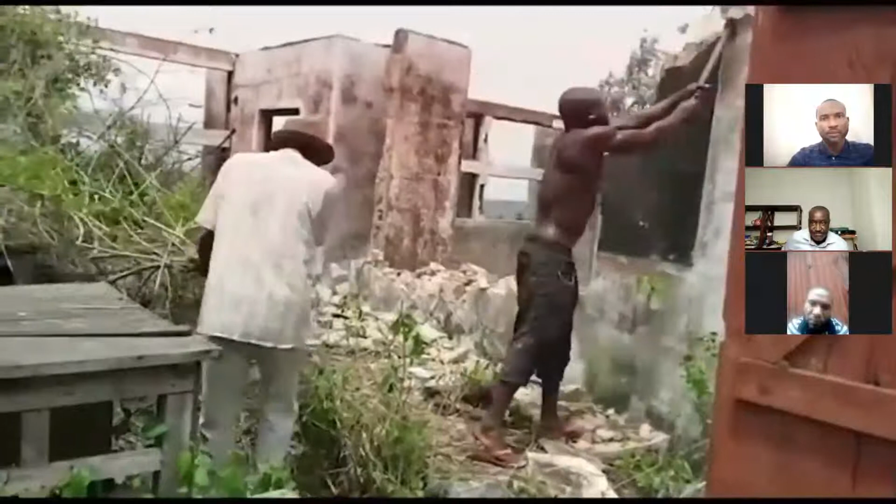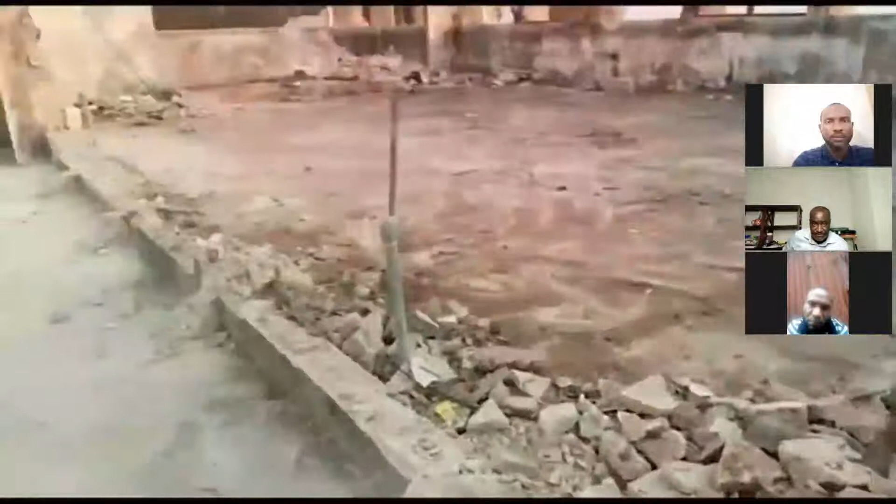Good day, everyone. I wish to welcome you to this ongoing project of laboratory renovation work by the IDA at the Ibere Secondary School. This is the first day at work. We began by demolishing part of the structure that needs to be adjusted. Here are some of the materials that have been supplied, and the walls are coming down gradually. The clearing work began today, and this is how far we've gone. We are gradually dismantling the areas that need to be demolished. These walls also came down today. This is the last section of the hall.

Clearing will continue tomorrow. Okay, so now, before this stage, what is the first stage before you get to this particular stage? Okay, every project begins with planning. Planning is one of the first things that happens where a client is able to say this is what he wants. It is the achievement of that objective that makes a good project. So before you start site construction works, you need to do a design that meets the need of the client.

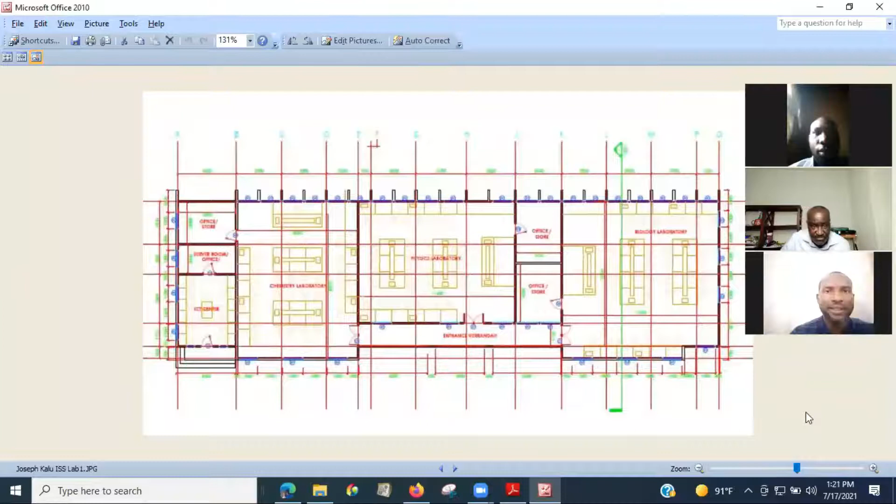Okay, so in this particular case, this was done, right? Yes, sir, it was. All right, just give me one second. So what is this called? That's called a floor plan, sir. Okay, so this is the first thing that is done. Yes, sir. So after this, what's the next thing? Or is there any other type of drawing that is drawn in addition to this?

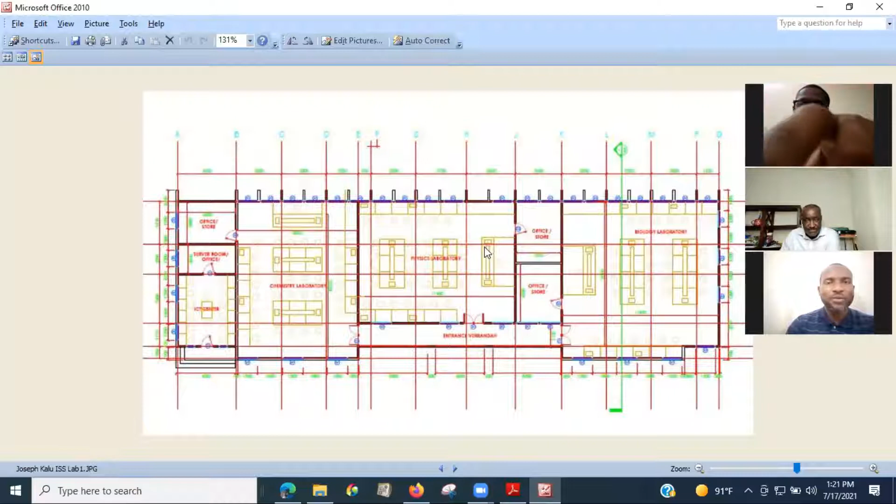Yes, the architect does not work alone. He works in partnership with the structural engineer, the electrical and mechanical engineer. We also engage the services of a surveyor who does environmental impact assessment, site analysis surveys, and all that. Those form the complete package of drawings. So depending on the complexity of the project and where it's located, those things are needed.

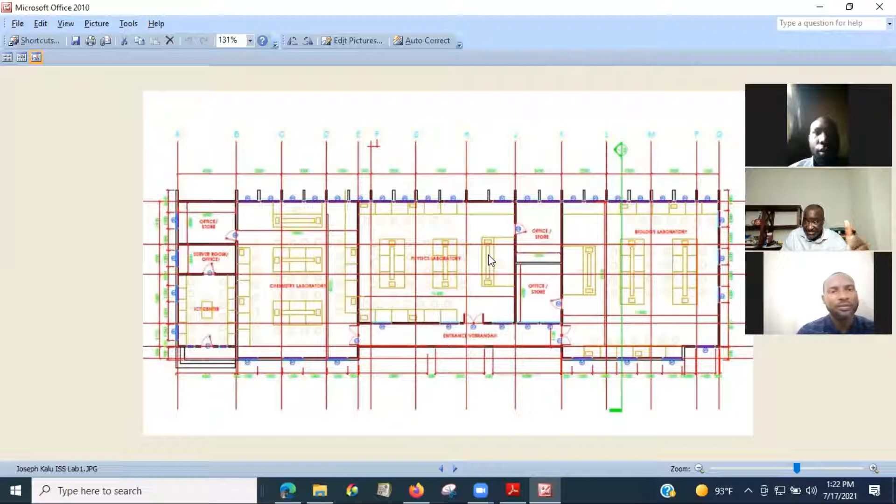So in this particular case, the services of an electrical engineer and a mechanical engineer were used, and they drew part of the necessary drawings. Yes, sir. Okay, so now how about this? Can you explain this to us, please?

This is a structural detail that shows the framing, the structural members, beginning from the columns to the beams and then the roof trusses. So it looks like there are so many pillars or beams, I don't know what they're called. So how many pillars can you tell us you have here?

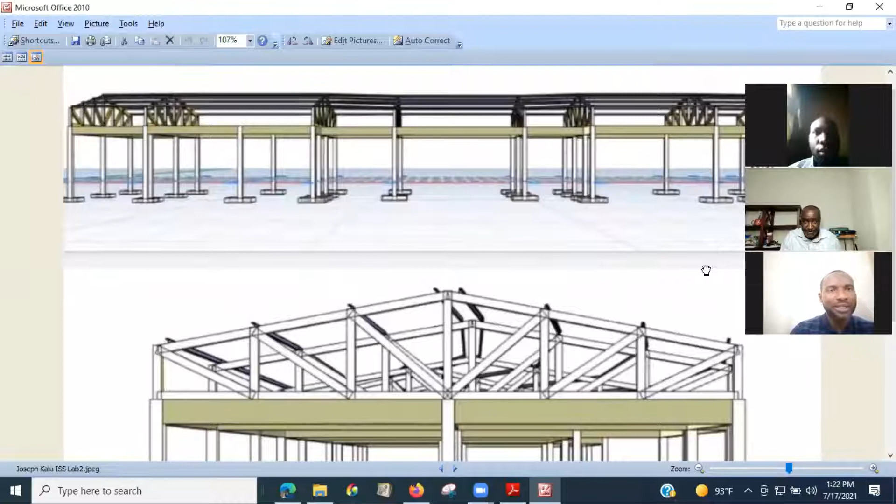Well, the number of pillars in a building depends on the span of the building. So it can vary, but you have to make sure it's within a safe span so that you don't have a collapse in your structure after construction.

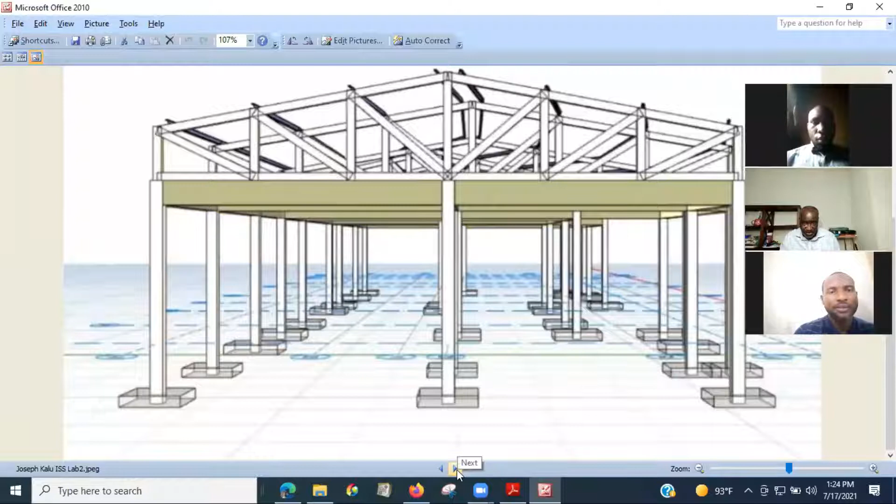Okay, how about this horizontal thing I can see? Those are called the beams. The vertical ones are the columns, and the columns have a base at the lower part which transmits all the forces the column is carrying safely to the ground. The beams link most of the columns together and also transmit the load of the roof evenly to all the columns, which then transmit it to the earth. So that's the purpose of columns and beams in a building. Yes, sir, they are structural members.

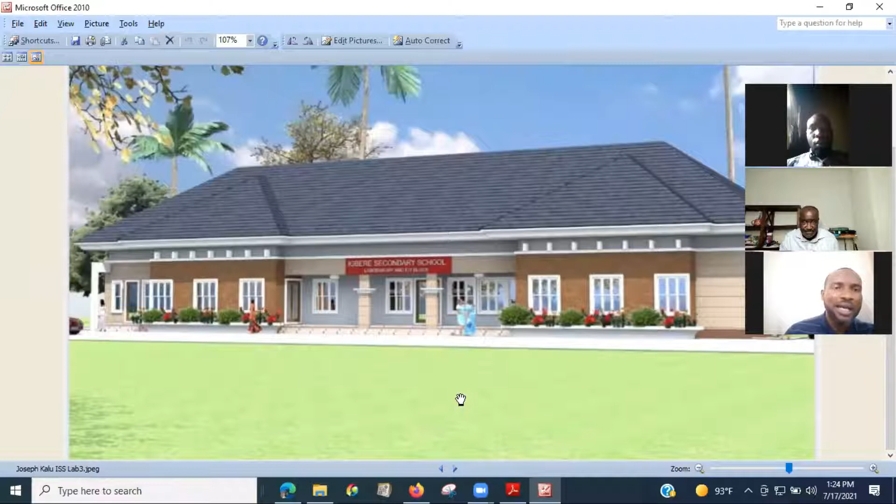So how about this? These are the 3D view of the structure, what it should look like after construction, sir. Like how many laboratories do you have in this structure? We have 3 laboratories, the chemistry, biology, and physics labs, and each of them has an office stroke storage area.

So now let's get back to that video and see. We have seen the demolition, let's see other stuff.

Good evening everyone, this is day 2 of work. Demolition is ongoing. We also started excavation and blinding of the foundation and installing of columns. This set of columns are in place now, and these other partitions with the columns are also in place. We hope to start raising new walls from tomorrow. I'll keep you posted as we proceed. Signing out on this second day of work is Architect Joseph.

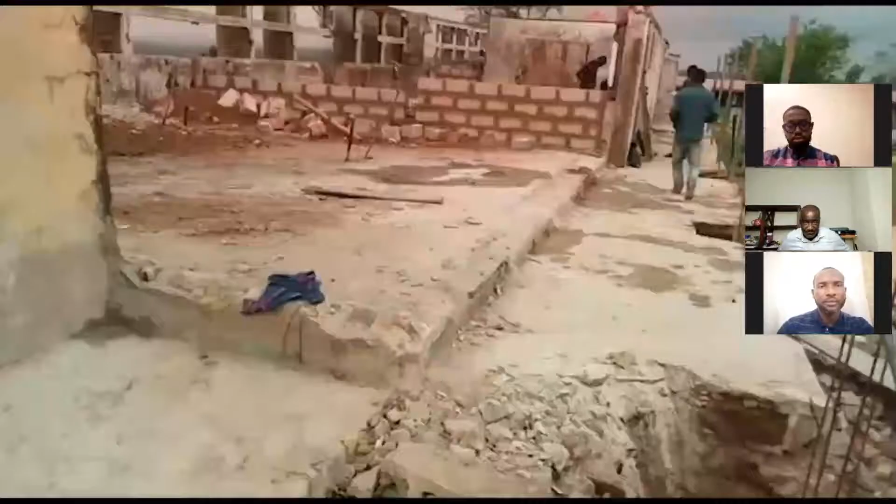Good day everyone, this is the 3rd day of work. The columns are in place, and the partitions for the laboratories are beginning to come out. The walls are rising. This is the first, and that is the second laboratory, and this is the third one coming up, with the office in place. We hope to take this journey further by tomorrow.

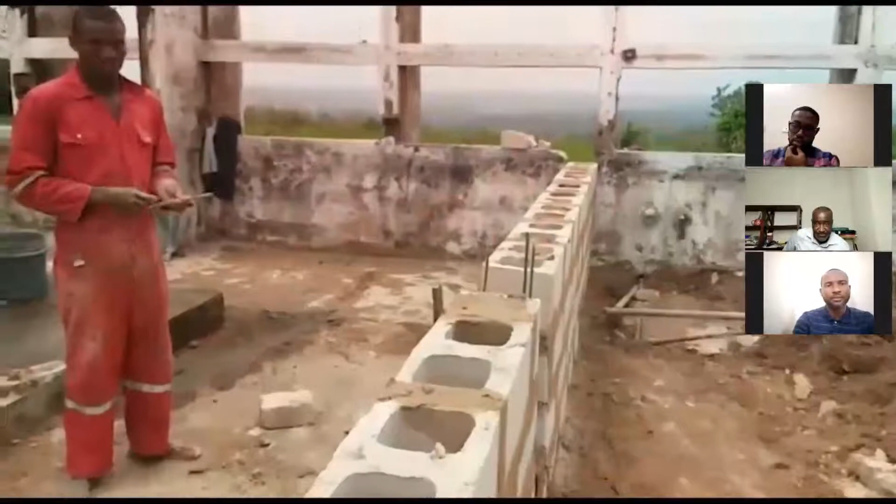Okay, so you mentioned about excavation and blinding. So what is that?

Okay, every building has basically 4 phases. One of them is the substructure, which has to do with the foundation. So for the columns, you start by excavating, then get your reinforcements in place, then cast the foundations, and begin to raise the block works up to the damp-proof course level. At the point where you finish your damp-proof course, you can say you're done with the substructure.

Then going forward, the second phase is what we call the superstructure, which has to do with the work from the damp-proof course all the way to the roof beam level. The third phase of buildings is the roofing stage, and the fourth stage is the finishing level. Then you could now have the landscaping coming up. So those are the various phases in building construction, basically.

So you mentioned the German floor, what is that? That is the damp-proof membrane, a damp-proof course, which forms the solid ground at your ground level, the final ground level finish.

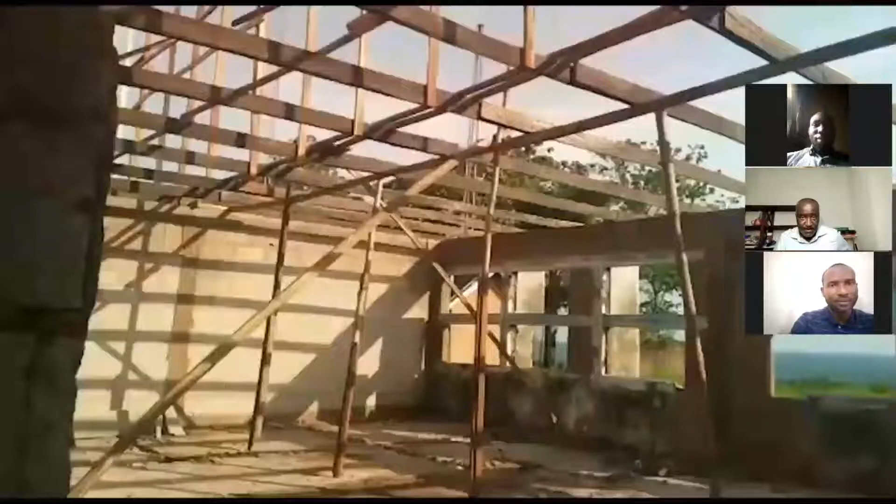This week we made progress on the roofing. We bought and started installation of the roof carcass. So far the king posts and tie beams are all up. Those are the tie beams running across, visible through this classroom, through the corridor, and into this classroom. We have to make good progress on this during the coming week.

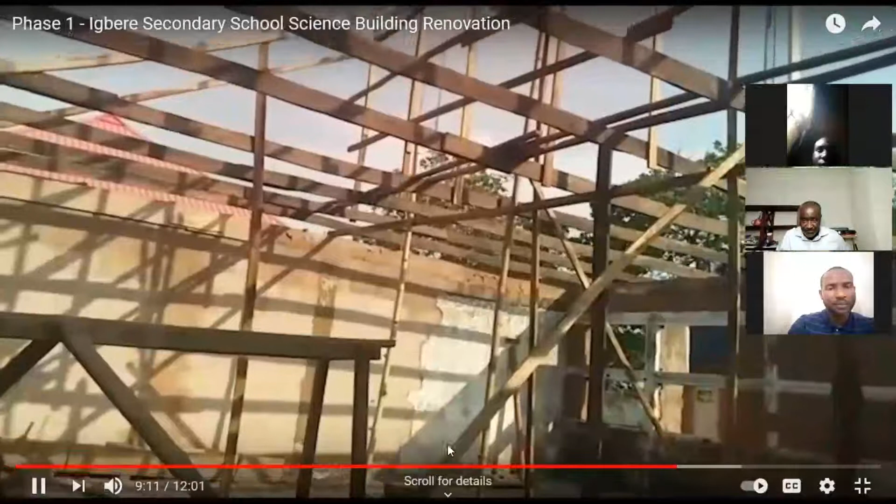So you mentioned roof structure or roof carcass, can you explain technically what that means? At the roofing stage there are three basic steps. One is the roof beams, where you chain the pillars and get a beam that collects the load of the roof and transmits it to the columns. The second is the roof carcass, where you do either a wooden truss or iron trusses. The third phase is what we call the roofing sheets, and the client may choose what material he wants for his roofing sheets.

Let's fast forward a little bit. So there's already roof installed, the roofing sheet going up at that point. I'm sure by tomorrow they'll be rounding up.

Good evening everyone. Today we come to the completion of this first milestone of getting this work to the roof. We are grateful thus far. God has helped in this project, and we want to thank everyone, the IDA people, that have made this possible.

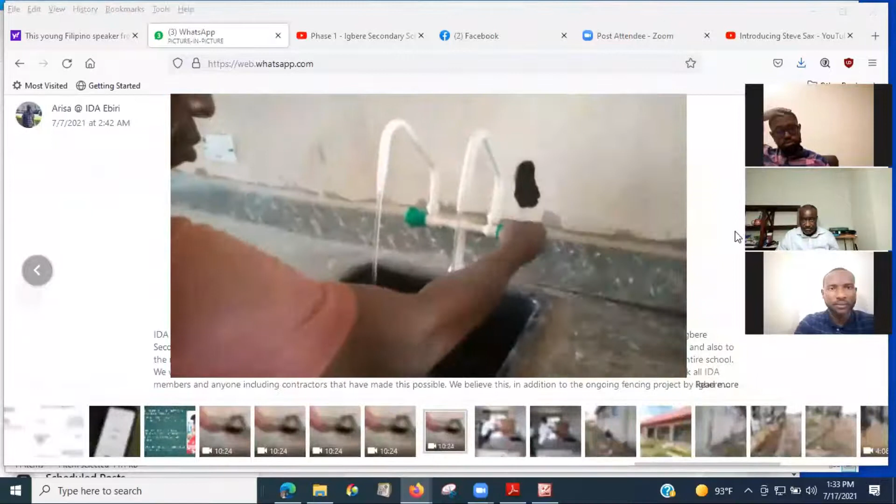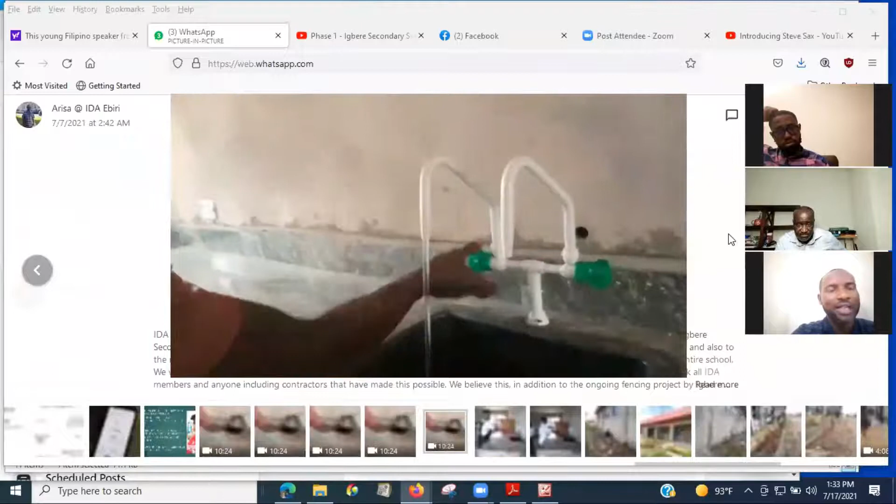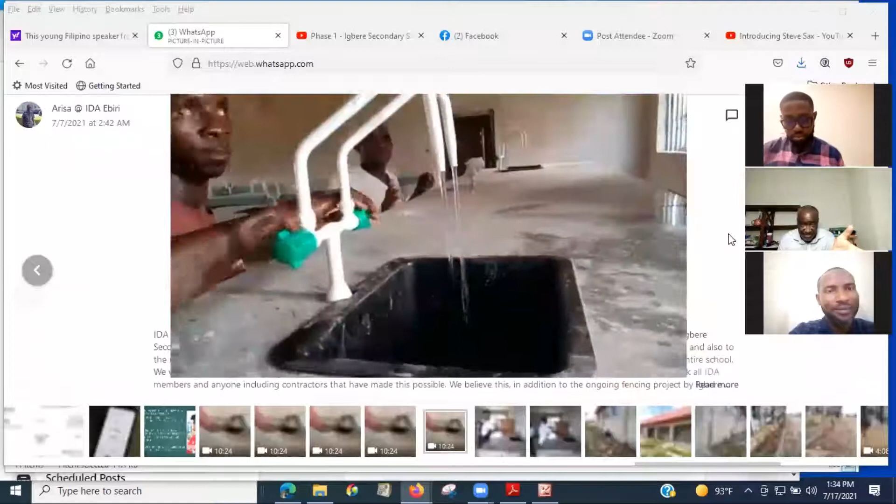Here you could see the basins are in place. There's now water in the laboratory. Gas has also been supplied to those platforms so they can do their experiments conveniently. So there's gas in this place? Yes, there is gas on each of those platforms.

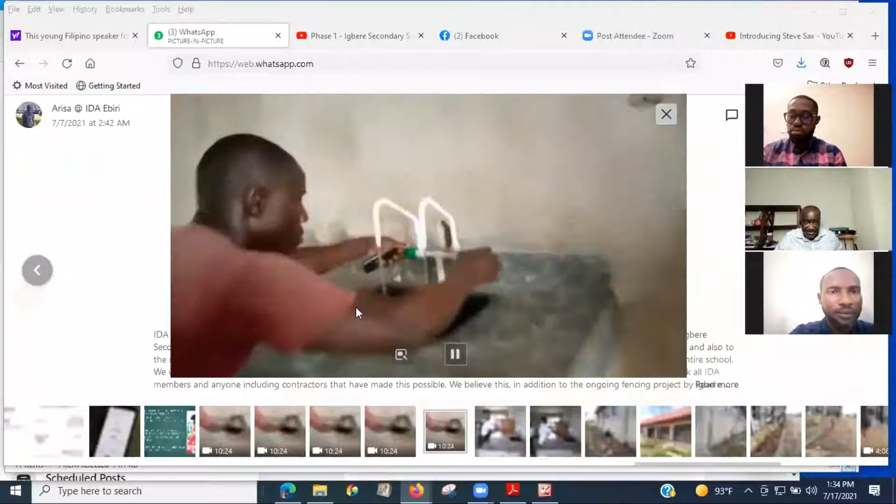You can see the platform has been done. The platform is made of concrete - what's the surface finish on the platform? They are tile finishing, sir. Okay, so all the taps are running. You mentioned it's almost what percent completed? 90 to 95% completed. What we have left is just the painting.

So at this stage today, basically what is left for the entire laboratory building structure to be completed is painting and then the shelves. Will the shelves be made of wood? Yes, wooden shelves, sir.